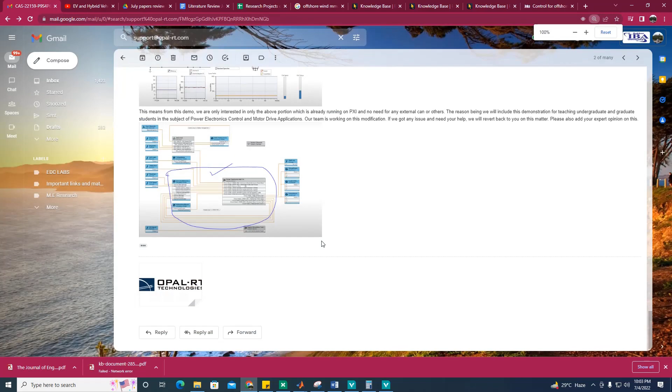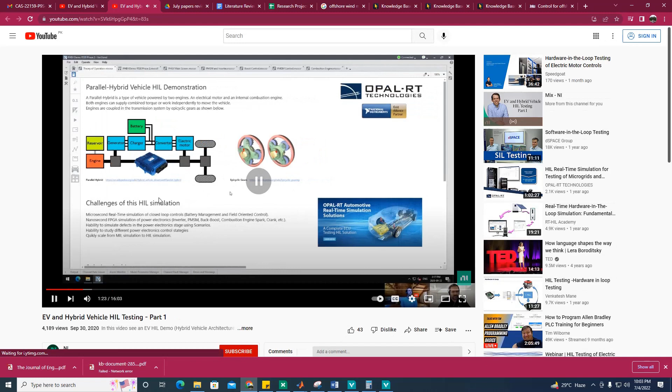Actually, we have recently migrated to VeriStand add-on Power Electronics, and we were working on this demo model. This demo model is very detailed, but we were only interested in this portion of the demo model, which is related to converters and driving a PMSM.

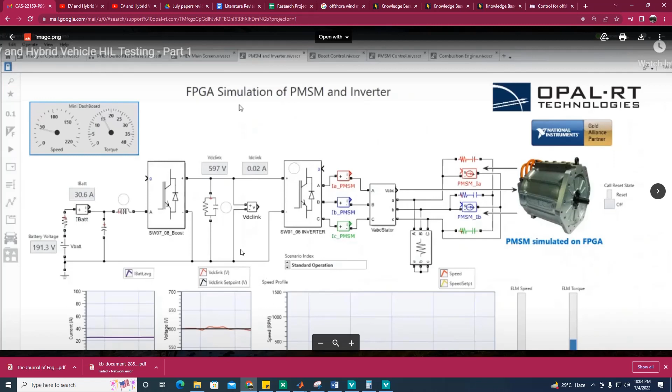Basically, this whole part is working in a PXI. So first, being the beginner, we were interested only in this portion, and our main interest at the initial stage was to see the result for the boost converter in a closed loop environment. So we wanted to load the boost controller MATLAB DLL file and see the results. So this was our aim.

This demo model we requested from OpalRT and they shared it with us. Erika Pearson was the person who was in contact with us during this ticket.

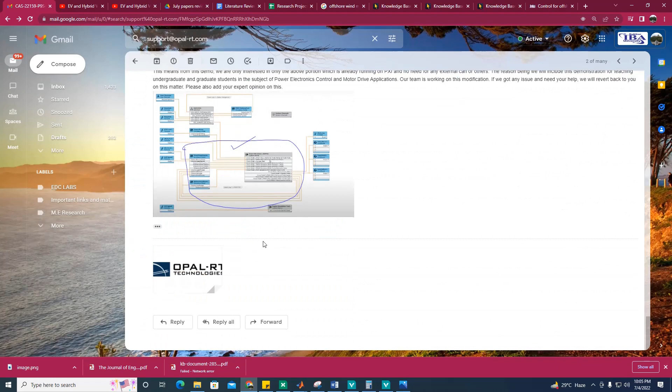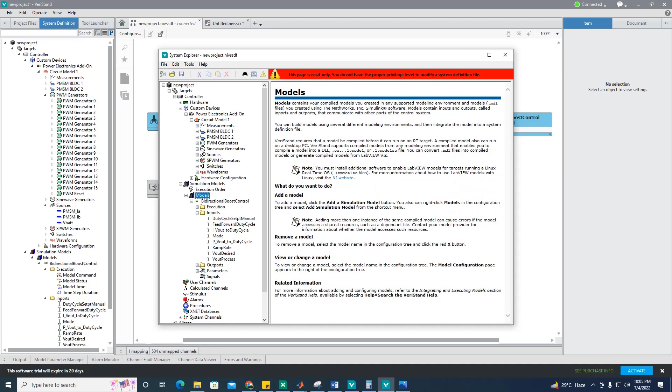So mainly we were interested to see the output of the DC boost controller. This is a bidirectional boost control, and this DLL file we loaded. These are the settings for PWM 0, and it is given to switch 7. These settings we confirmed from the video of the switches. Here is the DLL file that is already loaded, and we have mapped the duty cycle.

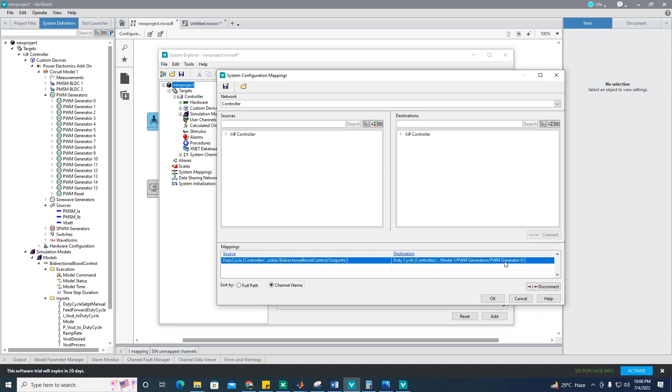Let us show you the mapping of the duty cycle, and for that I need to undeploy it. I go to mapping, and this duty cycle is basically given to PWM generator 0. Mapping is done here because in my case PWM generator 0 is used. So these are the settings. When I now try to run it...

I get some issue. This is connected now. So let's make the battery voltage 200 volts, it was 100 volt before. Output ramp rate I am setting to 1000.

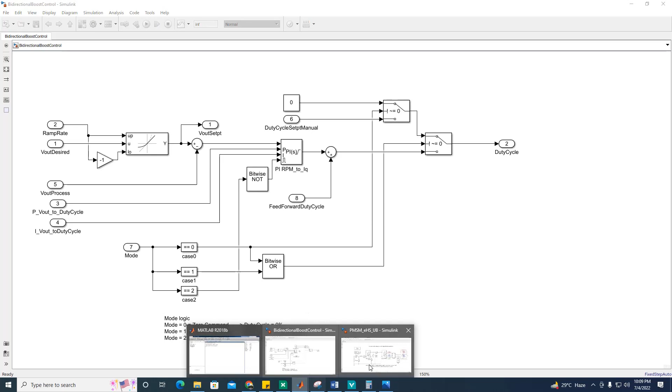When I set the mode to 1, which is duty cycle set to manual, and if I set the duty cycle to 0, or if I set the normal operation mode 2, duty cycle controlled by PI, here it is not working.

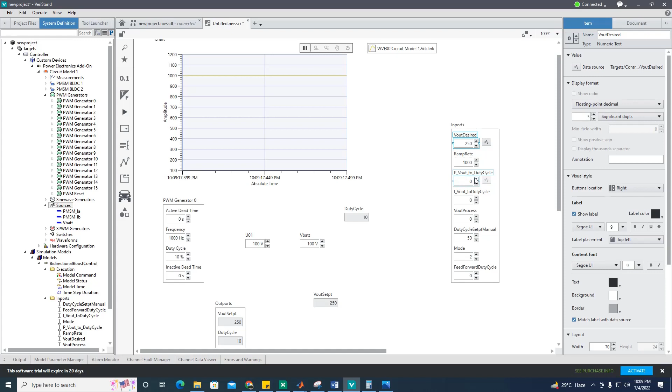You see, when I select mode 2, which is duty cycle controlled by PI, I get duty cycle 10% here and output is very high. I don't know what is the problem, where should I make changes to see the correct output, 200, let's say 250 volt, nothing is working. So can you please guide me what changes are required to operate it properly?

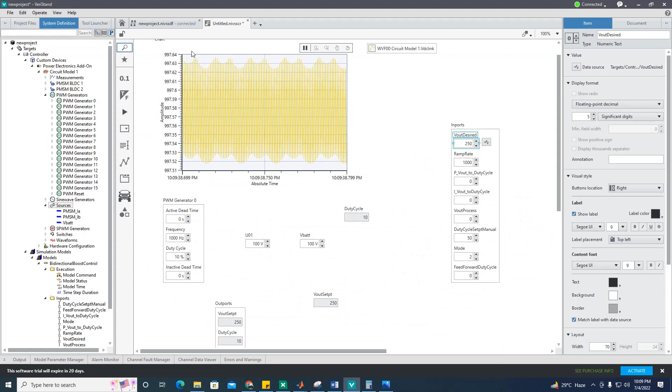So this is a circuit, and this is its controller. I also tried it another way, but that also didn't work. I tried to make the circuit from my side, the circuit of the boost converter. Let me show you here.

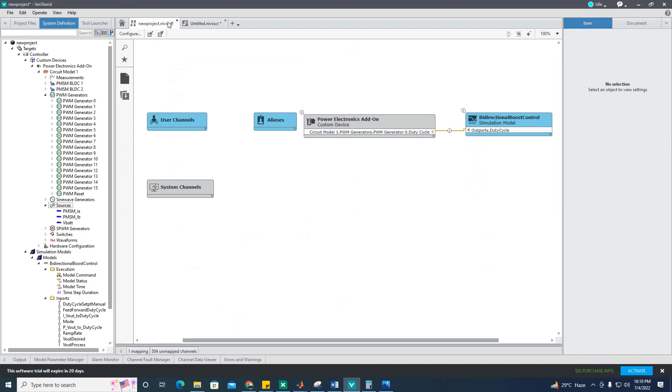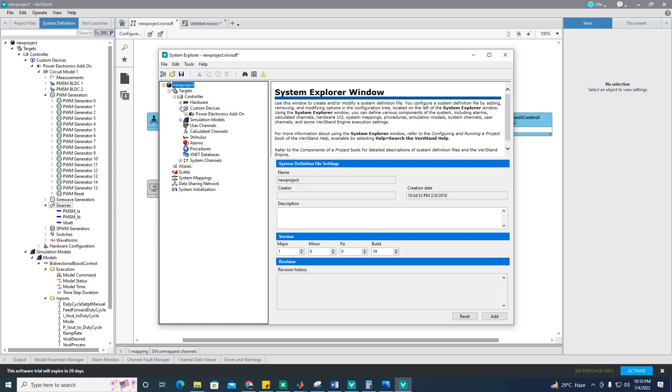This is a boost converter. Let's also give it a try. Instead of that circuit, now I am loading this circuit, which is in D, Boost1_SPS.

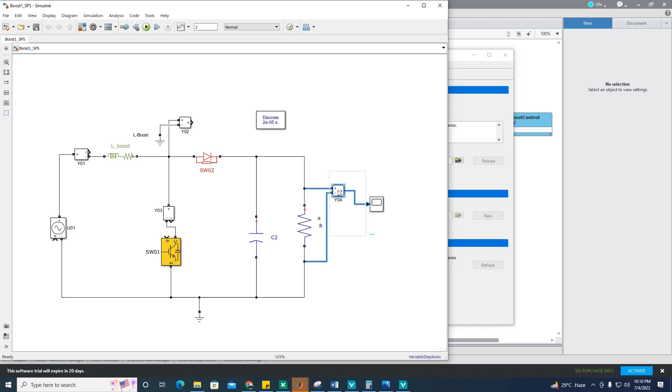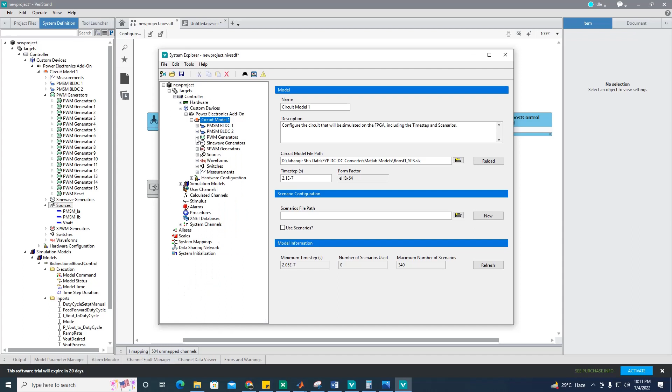Where U01 is input, I am interested to see output Y04. So this is the output I am interested to see. Let's refresh it. So my source is U01. Let's see. Let us say I want to see for now only output Y04, which is my output.

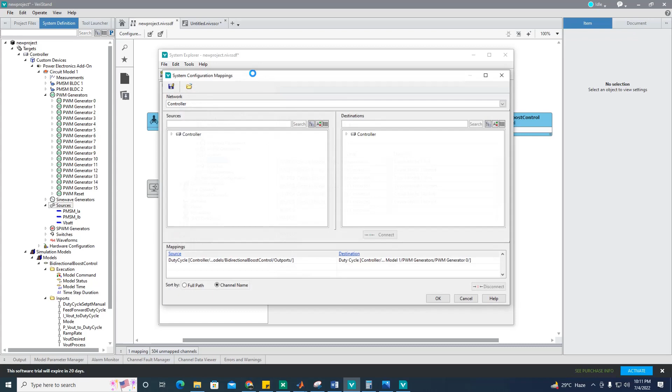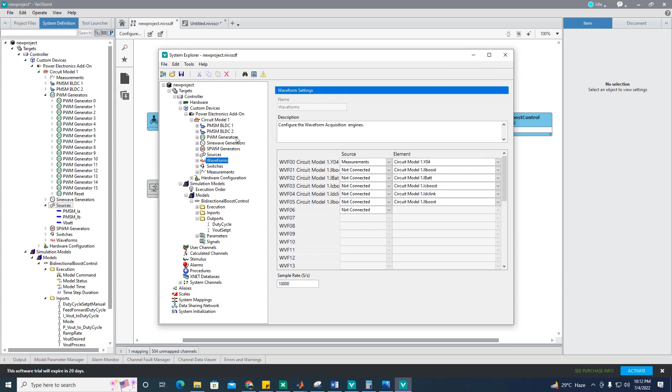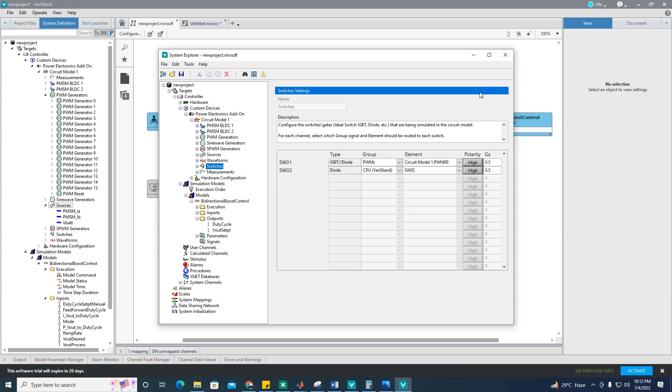Mapping is already done, PWM generator 0. Let's now run this model. Okay, let's give it PWM, PWM 0. Let's deploy the model.

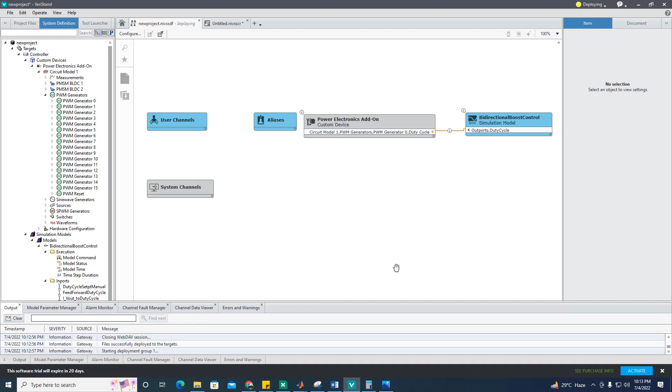So target synchronization is complete now. See the output here is now Y04. My U01 is 100 volt. Now let's make it 200 volt and set this ramp rate maybe 1000. So V out desired is 200.

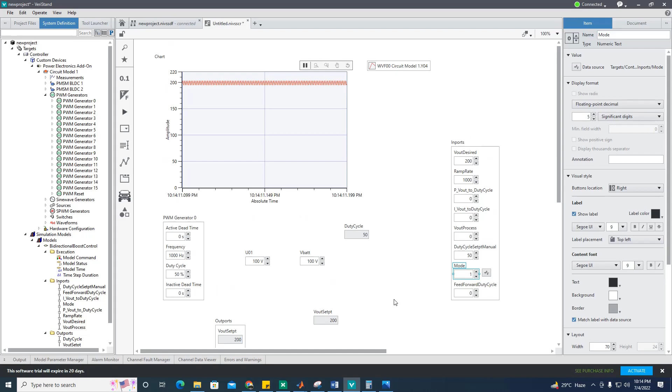You see that this is not working fine. Let's now try to run it in manual mode. So when it is set to 1, this is manual mode, and at manual mode again this circuit is working fine: 200 volt for 100 volt input, and for 50 volt this should be 100.

And if I make this duty cycle 40%, so as per formula V in over 1 minus D, it should be... sorry, 150 volt. Let me check it. Sorry, when I make it 100 volt and set duty cycle to 60%, it will be 250 volt. Okay, now right, because V out equals V in over 1 minus D. D is 0.6, 1 minus 0.6 means 0.4. 100 divided by 0.4 is 250 volts.

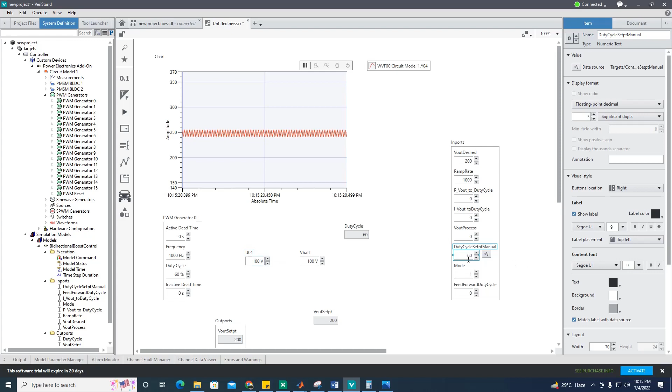So this is working fine in case of open loop, but when it is in closed loop, I don't know why, but the output I am getting is not as per my requirement. It's not changing. Where is the problem? Please guide me. Thank you.